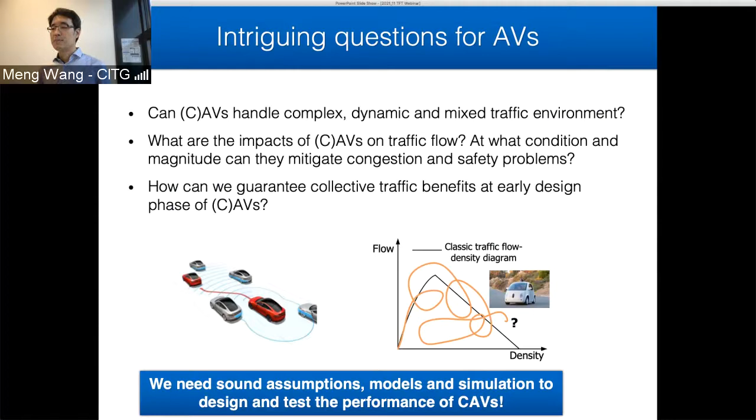Automation may give you accurate control of your vehicle. If you set your speed at 100 kilometers per hour, the automation system can precisely track this speed. Automation can also be reliable if well designed, and it can react faster if it can communicate with other vehicles or infrastructure.

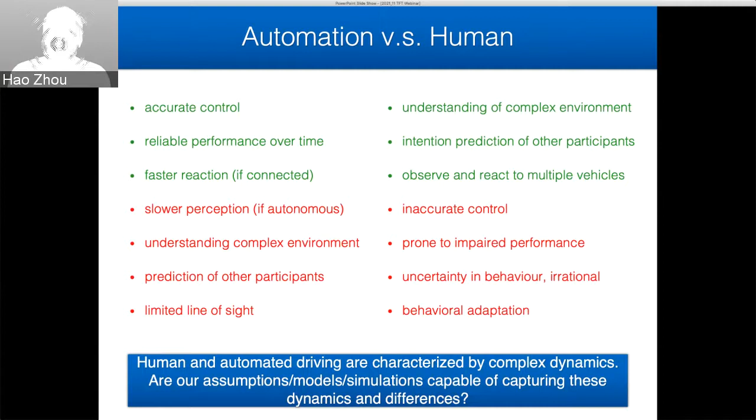But these are actually not good aspects for human drivers. We cannot precisely control our speed or steering. We are prone to impaired performance under alcohol or drugs. Our behavior is sometimes irrational, and we adapt our behavior based on the dynamic environment.

On the other hand, automation, if it relies only on onboard sensors, the perception is actually not very fast. It's a challenge for automation to understand complex driving environments, and it's difficult for them to predict other traffic participants. The onboard sensors are also occluded, therefore you have limited line of sight.

But for human drivers, experienced human drivers are very good at understanding and making decisions in complex environments. With the blink of an eye, you would know whether a pedestrian in front of you will cross or wait. We also often observe and react to multiple vehicles. These are actually advantages for human drivers.

Now we can see that human and automated driving are characterized by complex dynamics. The question is, are our assumptions, models, and simulations capable of capturing these dynamics and differences?

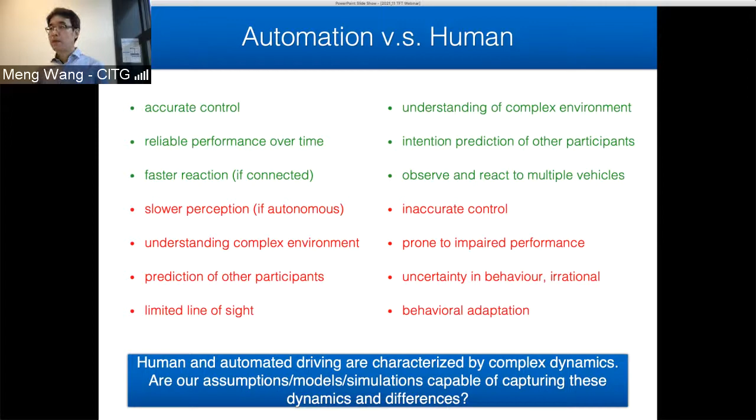What we often see is that for the ego vehicle, either an automated autonomous vehicle or connected automated vehicle, there are assumed to be zero delays in the sensors and communication, zero delays in the vehicle actuation system, deterministic vehicle dynamics, no limits on sensor range, no limits on operational design domain, and therefore no human-automation control authority transition.

Now, we all know that all the automated driving systems being developed have limited operational design domain, and this clearly shows that we are missing something there.

For the surrounding vehicles in mixed traffic, I want to make a point: we also use simplistic assumptions about their vehicle dynamics. Especially, I want to point out here the lateral motion.

In many traffic simulation environments, the lateral motion is lane-based, so vehicles are often centered at the lane center, meaning there's no lane-keeping behavior modeled. And when vehicles change lanes, they either jump instantaneously from one lane to the other, or jump over a fixed duration of time.

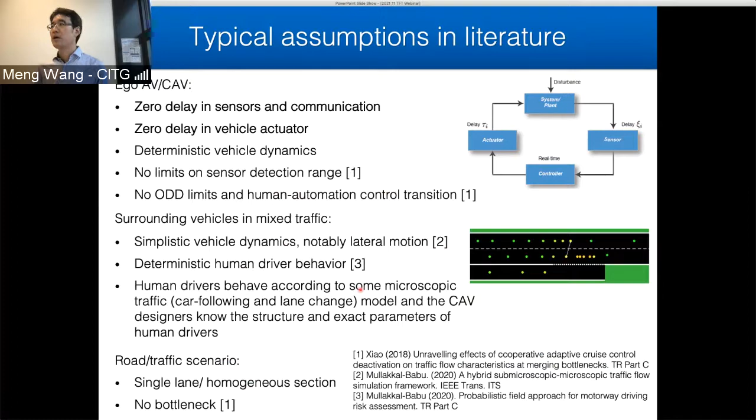Today I'm going to focus on the first two points, which relate to the delays in the sensors, communication, and vehicle actuation systems.

Let's start with the ACC system, which is the topic of this webinar series. ACC, in my definition, is an autonomous system in the sense that these systems only rely on onboard sensors and there's no communication involved. In general, they operate in cruise control mode at some desired speed when there's no predecessor, and then follow the predecessor with some desired distance, which is often a function of ego vehicle speed. You also want to track the speed of the predecessor with zero speed difference.

Such systems are often myopic in the sense that you only react to the direct predecessor. Because of physical properties of the sensors and actuators, there are actually delays in the information you get from the onboard sensors, and there is also a time lag or delay in the actuation part of the system.

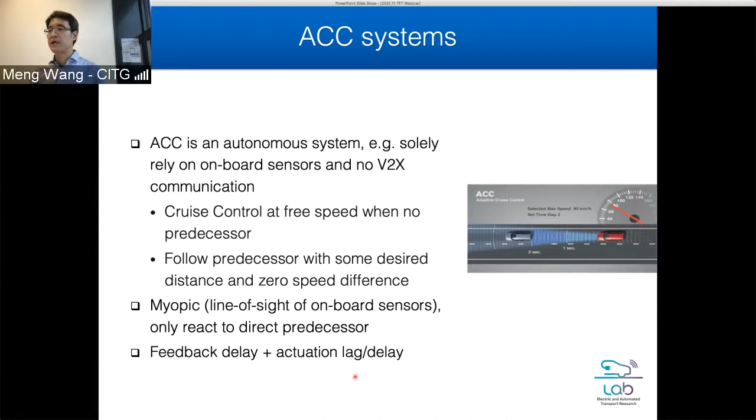We want to know the system dynamics. If you differentiate this state vector, you get relative speed, the acceleration of the leader and the ego vehicle, and the derivative of the acceleration of the ego vehicle, which is the jerk, formulated in this fashion. Here, tau i is the actuator time lag, to be precise, and u i is the control input we want to compute. a i is the actual vehicle acceleration. So what this says is that with tau i, you cannot realize your desired acceleration instantaneously, but this needs to be realized after a lagged time.

So how do we design u i? There are different ways. In general, when we compute u i, we formulate it as a function of spacing, ego vehicle speed, and predecessor speed. We want to include delay in there, so these three signals are subject to a delay xi. When we put this control law back into the system dynamic equation, we get this closed loop formulation of the system.

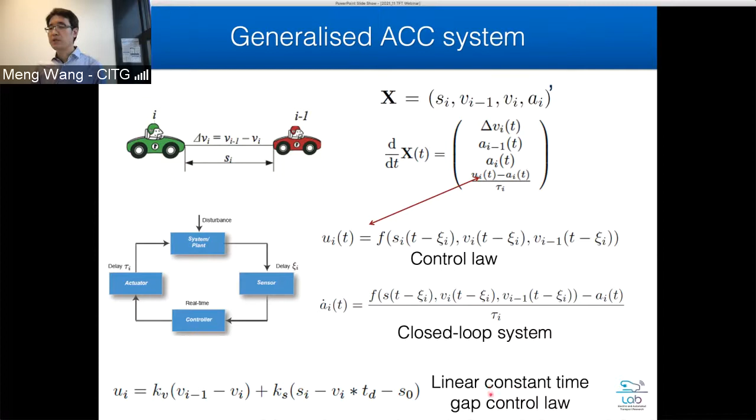Now, with this formulation, we go to the definition of string stability. In general, there are two types. One is very strict, what we call strict string stability. This says that H(jω) is, in general, a disturbance transfer function, where ESI is the disturbance of vehicle i, and ESI minus 1 is the disturbance of the predecessor. For strict string stability, we examine each leader-follower pair, and we require that the disturbance of the follower is smaller than that of the predecessor.

Another, a bit weaker concept is head-to-tail string stability. I don't really care what happened in between the platoon, only the first vehicle and the tail of the platoon. As long as the disturbance at the tail is smaller than that of the head, the platoon is head-to-tail string stable. For a homogeneous string, where all vehicles are the same, there is no distinction between these two definitions.

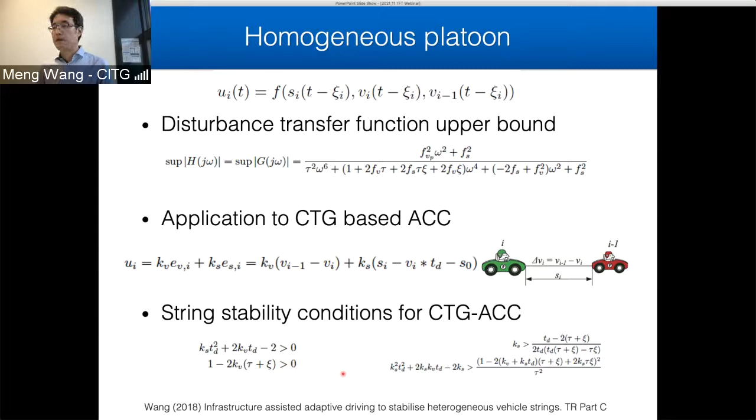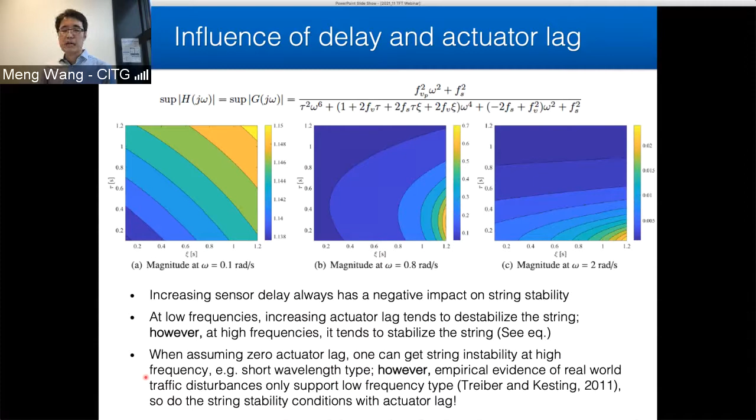And so do the string stability conditions with actuator lag. If you look at these conditions at high frequencies, there won't be disturbances or string instabilities. So that means we have to be careful when modeling sensor delay or reaction time without considering the actuator lag — you may get into string instability at high frequency disturbance, but this is not realistic. That's one message I want to convey.

Now let's look at the influence of the three design parameters we mentioned: the time gap, the feedback on gap error, and feedback on speed error. In these plots, on the top three plots, we see the different region in the Ks and Kv plane under a certain time gap setting.

The green and blue regions are stable regions, and the orange and dark red regions are unstable regions. The top three figures are results with delay considered. The bottom three figures are the same parameter setting but without any delay.

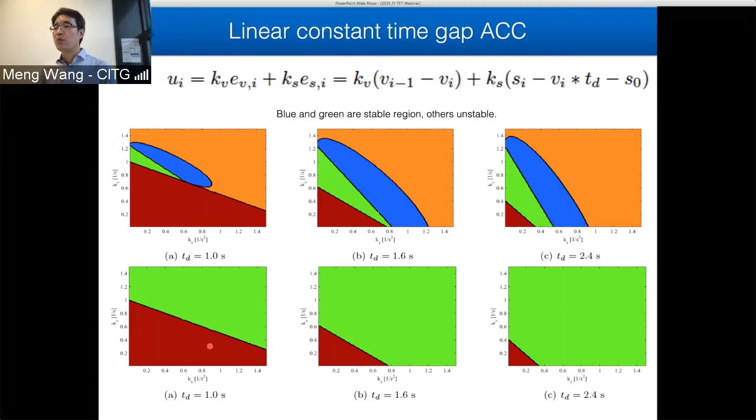So what you see clearly is that when we don't consider sensor delay and actuator lag, you really overestimate the stable region. Now the consequence is that you may overestimate the benefits of such systems when you use these to simulate ACC or CACC, and this may even lead to invalid parameter settings that you assume to be stable, but in reality they are not.

So here is another message that I want to bring across: we really have to be careful to derive conclusions when you parameterize your controller or your model based on a zero delay assumption.

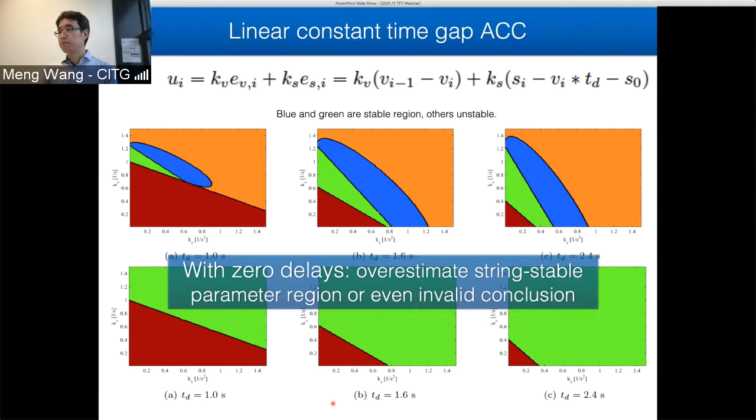Now, as I said, I am an engineer. I also want to solve problems. So we know that delays are detrimental for string stability, and we want to see how we can compensate for delay.

An intuitive solution is that at the current time t we don't have the current state information, we only have delayed state information. So one of the solutions is to use a state predictor, and one of the well-known ones is the Smith predictor, and then use the predicted state still in the state feedback controller. I listed two examples here, and there are other examples in this line.

I want to talk about four other solutions which we have done some work on. This includes using model predictive control to compensate delay, formulating a new desired spacing policy that anticipates the delay already in the spacing policy, and reformulating the CACC from time domain to space domain, and resorting to vehicle-to-infrastructure communications. So let me get you through these four solutions one by one.

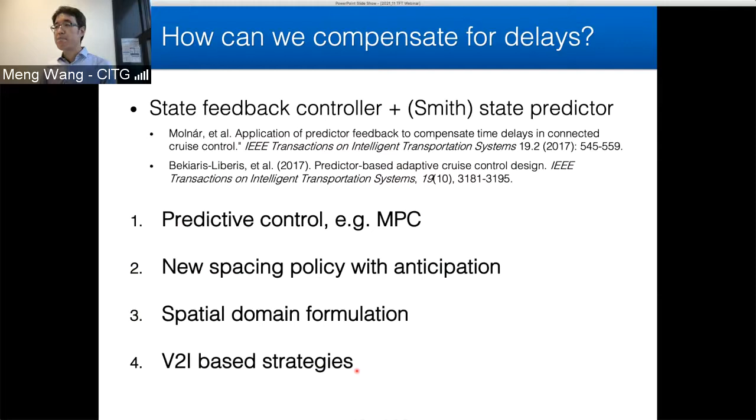So let's start with the model predictive, MPC based strategy. I list here a minimal formulation of MPC. There is no need to understand all the notations I listed here.

But for MPC, you do need a cost function or cost functional you want to minimize, and you need a model for your system dynamics, and you need an initial condition at current time t0. And these state variables x and control variable u are often subject to some constraints.

Now, the idea of MPC is that at the current time t0, you want to use the initial condition and the system dynamics and some arbitrary control input to predict the system trajectory in the future, which is the solid red line. And you want to optimize this trajectory of u such that the difference between the predicted trajectory and the desired trajectory is minimal to some extent.

And then for an MPC setting, I don't use all of the predicted optimal control trajectory, but only use the first sample to regulate the system. And then at next time step T1, when we have new sensory information or communication information, I redo this optimization again, and again I only use the first sample. So this is the general idea.

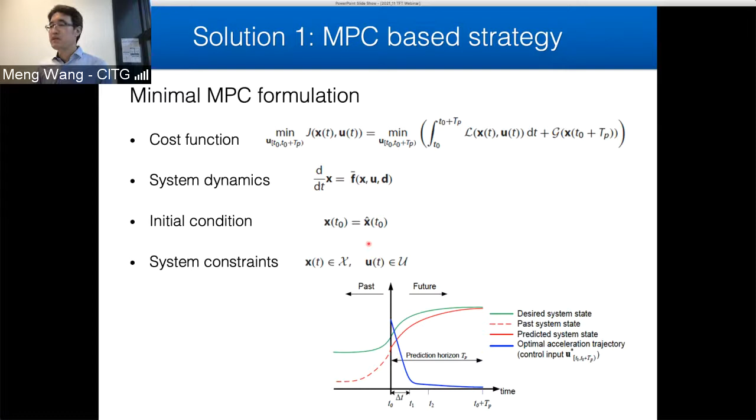Now, when we have delay, there is a problem, right? The problem is that we don't have the current state information, we only have delayed information. How can we do MPC in this setting? I use the figure here to illustrate the problem and the possible solutions.

Now at this time t, we want to have this state information, but with the time delay, we don't. We only have this state information at previous time t0 minus the delay. And then how do we do the MPC? We still need to have this state information at t0 and make a prediction.

A naive strategy, which I call it, is to simply use this state information, add the information at time t0. This is visually shown here. So you basically drag the state information to the current time, and you can clearly see there is an error here. On the top is the real state you want to use, but actually you don't get that information, so you use this old information instead.

The second option, because we are doing MPC, is to shift this prediction initial time from t0 to t0 minus xi. And because typically the TP will cover a longer time than t0 plus t1, I can still use this initial condition, this initial time, to compute some optimal control trajectory that spans over this t0 to t1, and I use this sample to implement to the real system.

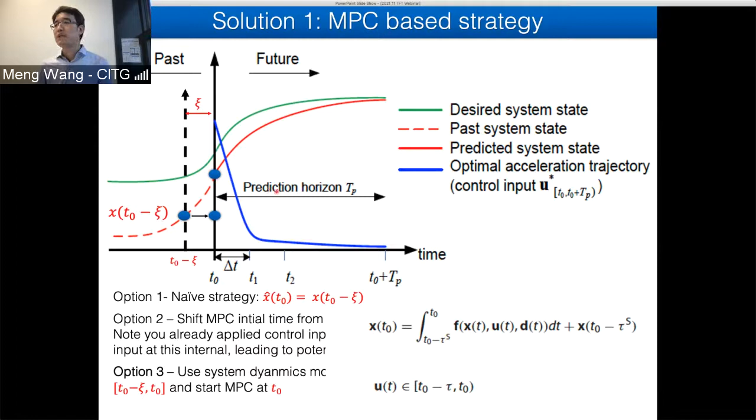The third option I'm proposing is: we have this delayed information, we have a system dynamic model, and we have applied the control history at this interval. We use that to estimate the state at this t0. Mathematically, this is just an integral. So what I want to estimate is the state at t0, integrating using the initial condition. I use a different notation for delay, but what I mean is this state information, and I know the control history in this interval. Then I can get an estimate of this state, and then I start with the MPC again. So that's the idea with the MPC-based strategy.

And with that, I can show this simulation: this is the case without any delay compensation, and this is option 3, using this MPC-based delay compensation strategy. You can clearly see the benefits.

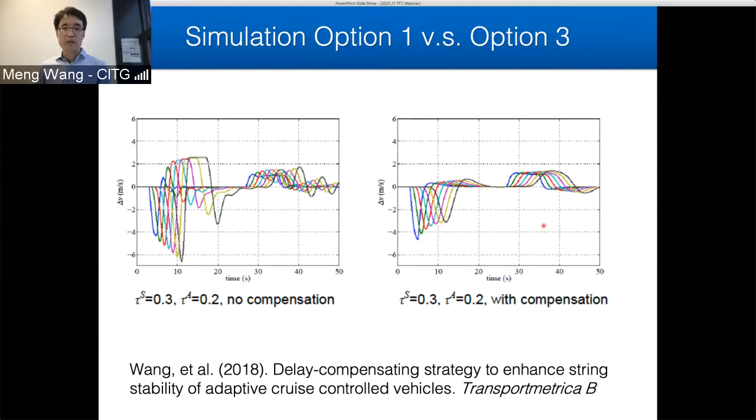So we want to reformulate a gap policy such that the platooning system becomes stable again. To do that, we again need to reintroduce some basic formulation. We use the same vehicle dynamics I introduced before: position, speed, acceleration derivatives result in this actuator time lag.

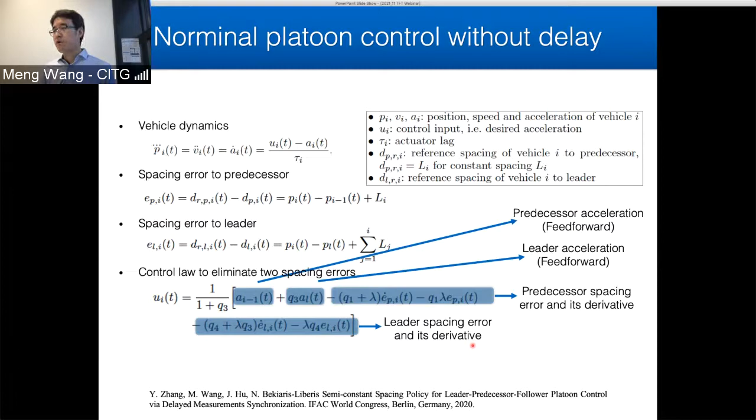Assumptions made in this work are that there are communication delays in whatever communication link we assume. The position and speed of the predecessor are obtained from onboard sensors, so subject to constant delay delta S. Acceleration of the predecessor is assumed obtained from vehicle-to-vehicle communication, with a bounded delay delta p, and the position, speed, acceleration of the platoon leader is obtained from vehicle-to-vehicle communication and subject to bounded delay, with an upper bound and lower bound.

We also assume that the leader information delay between 2 consecutive followers is bounded. So the communication delays are time varying, but we know their upper and lower bounds. The vehicles in the platoon can have different delays and different desired gaps. So these are the assumptions we made when we designed the system.

So let me give you some insights into the two error terms when we have delays. Something interesting will show up here. When we have delay, we don't have the current information, only a delayed leader speed signal.

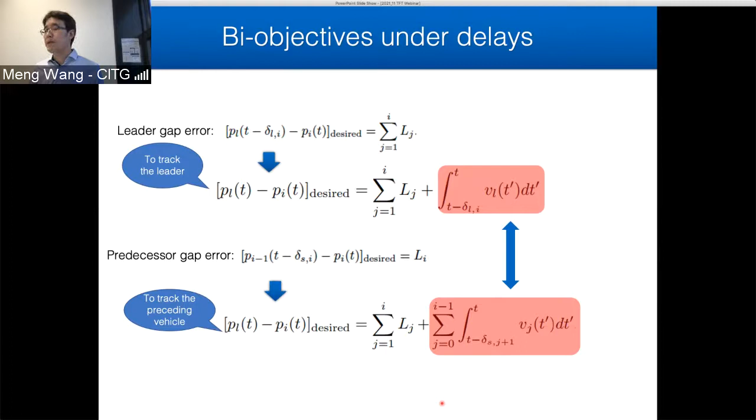So that leads to the instability we see in the simulation. What we propose is to add an extra term. I use GI here to represent a memory time window. This basically says, apart from the constant spacing, we also add the distance that the predecessor i-1 traveled during this memory time window. How to select this memory time window: it should be larger than the maximum delays of the different delay sources—sensor delay, communication delay, and the delay difference between consecutive vehicles in the platoon.

With this new policy, we can recompute the predecessor gap error and leader gap error. So GI will appear in the position of the predecessor term, and HI will appear in the position of the leader gap error, leader position term. HI is not a new parameter, but a sum of the GI over the memory time window for each vehicle between the subject vehicle and the leader.

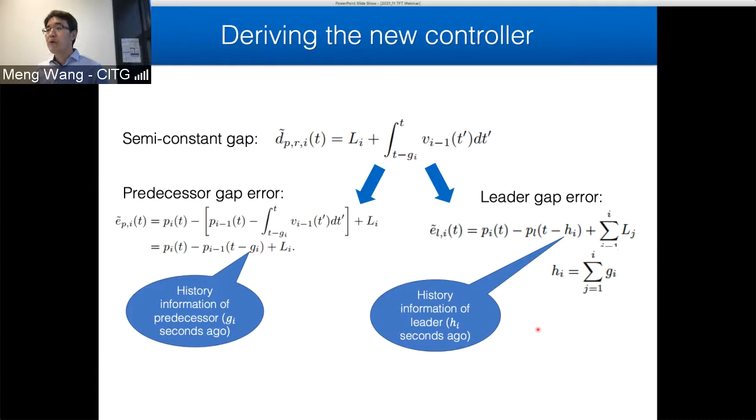So with this new error term, we put it back into the control law. What you see here is the same control law with the same control parameters, but only the time argument of the signals is different. What I want to highlight is that all signals related to the preceding vehicle i-1 now become t minus GI, and all signals related to the platoon leader have time argument t minus HI—for acceleration, speed, and positions. So at least for each vehicle, the signals are synchronized.

If you plot this magnitude plot, you can see that without treating the delay, this platoon example is unstable because the magnitude is larger than 1. But with our new formulation of the spacing policy, we get a stable string.

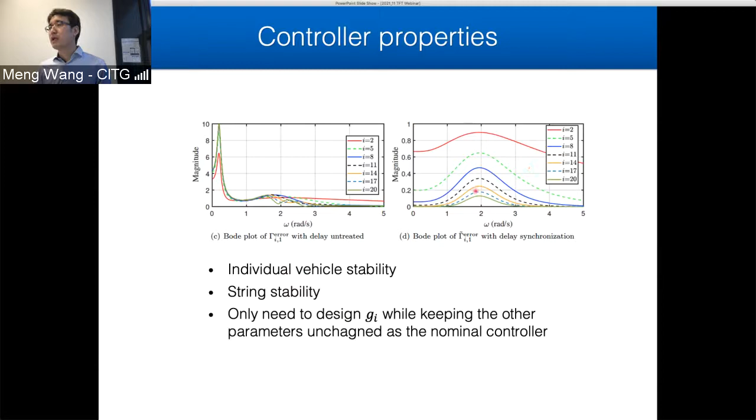And this is clear also from the simulation results. On the left, the nominal system without any delay is stable, but with communication delay, the string becomes unstable. With our new spacing formulation, even with delay, we can compensate such that the string becomes stable again.

Now, this idea of reformulating the spacing policy appears to be generic, in the sense that it can be applied to the constant time gap policy of CACC with both communication and actuator delays.

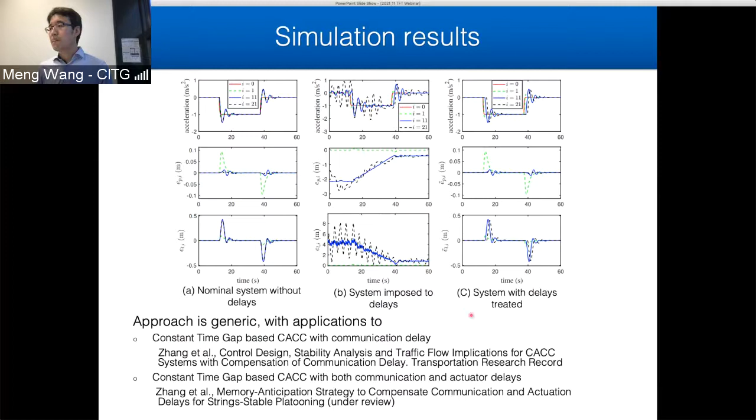So I will stop the second solution here, but go quickly to the third solution, which is to reformulate the CACC system in the space domain. The idea is to use distance traveled as the independent variable and time as the dependent variable. The advantage is that when you look at a certain position, you want to regulate the ego vehicle such that it keeps a desired gap to the predecessor at the same position.

And then often at time t1, you already know the history information of the predecessor. Although there is a delay, as long as the desired time gap is larger than the delay, you can actually have this information. Now, how to do that? We need to do some translation from the time domain to the space domain. I guess I need to hurry a bit here.

So the independent variable is changed from time to space, and the dependent variable is swapped. In the time domain, you have the first derivative of speed, then the second, acceleration, and the third derivative, jerk. In this space domain, we use a similar concept, calling it slowness, moderation, and derk. And the relative dependent variable in the time domain is the distance headway, but in the space domain, we call it the time gap.

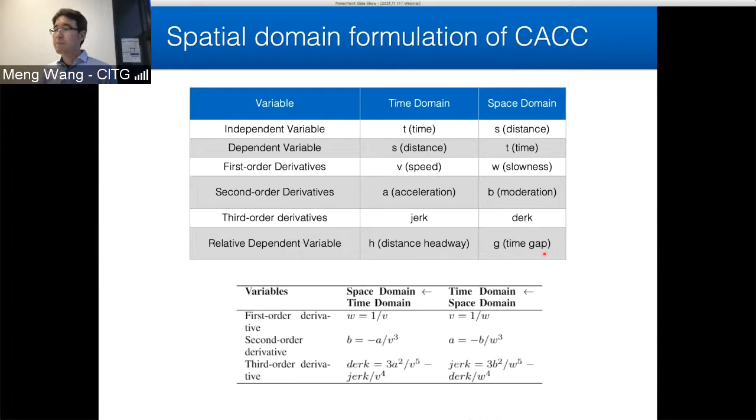In the state space formulation, we formulate the state as the difference between the desired time gap and the real time gap, and the difference between the slowness of the ego vehicle and the predecessor, and the moderation. This is equivalent to the spacing error, speed error, and acceleration in the time domain formulation. The control input here is the desired moderation, equivalent to desired acceleration. For the objective function, we just use a quadratic form.

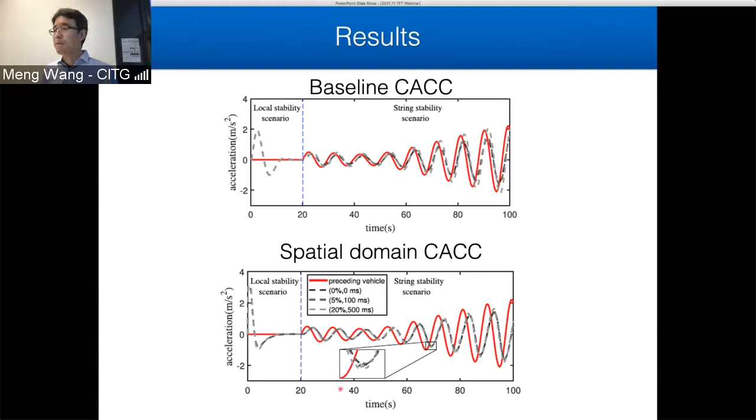Here is the simulation result. In theory, we can prove that this is string stable. Here I show the simulation: if you see this baseline time domain CACC, the dashed line is the follower profile, and the disturbance is larger than the predecessor, which is the red line. In the space domain formulation, if you zoom in, you can see that the disturbance is smaller than the predecessor. So this is the third solution I want to mention.

The last one is to resort to vehicle to infrastructure communication, because V2V is nice, but there are uncertain business models, and you need a decent market penetration rate to get platoons. What can we do at low market penetration rates? Here's an idea that we thought could be useful to stabilize a mixed traffic string.

Suppose the intelligent infrastructure can obtain the position and speed information of a string of vehicles and estimate their parameters. One of the vehicles, a CAV, can communicate with the intelligent infrastructure about its exact control and system delay parameters. With that, you can compute the string stability condition of the platoon. If it is unstable, you can adapt these CAV parameters, the desired time gap, the feedback gain on speed error and gap error, to stabilize the platoon. After the disturbance, the CAV can restore to its default parameters.

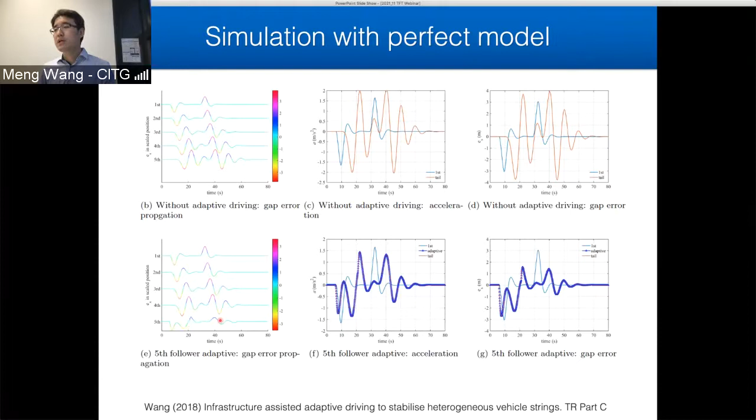Here's a simulation with a perfect model. The fifth vehicle is when we don't do any adaptation, the disturbance is larger than the first vehicle. But when we do this adaptive driving parameterization, you see the disturbance is damped out.

Let's come to the end of the talk. There are assumptions that we use in modeling and the design of the ACC and CACC. We really should be careful in order not to overestimate the benefits and to avoid invalid modeling and design results. The delays are intrinsic properties and have detrimental effects on string stability, and the influence of parameters on string stability can become non-monotonic under delays, so we really have to be careful there. I illustrated a few strategies that we can use to compensate for delays.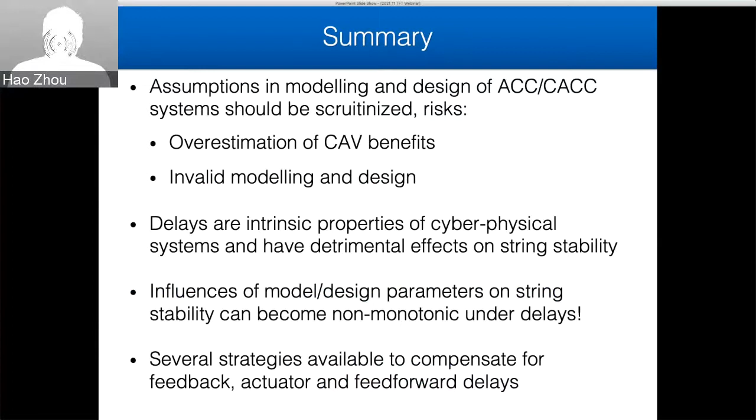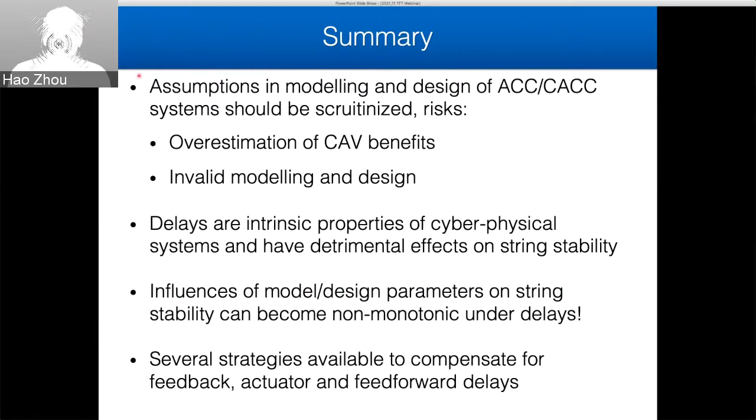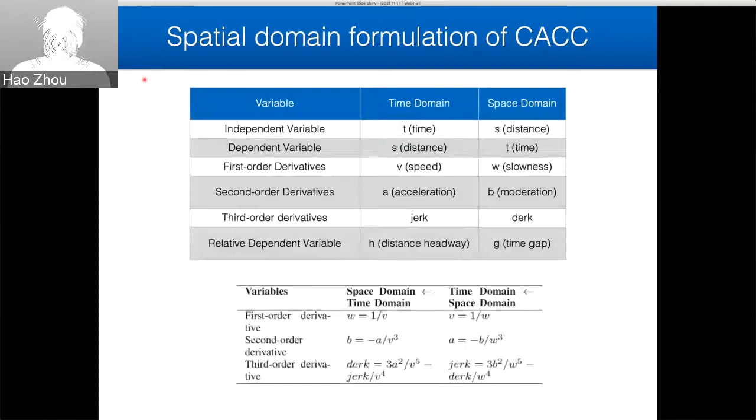I have a question first. Can you go back to solution three? You went a bit faster there, the space domain formulation. You mentioned you use your leader's trajectory as a reference. Can you elaborate a little bit more on how you use it as a reference? Is it similar to MPC or something else?

So this is indeed an optimal control MPC type formulation. At each space position, I want to regulate the ego vehicle such that it keeps a desired time difference to the predecessor. When you are at this time, this position is history information of the predecessor. So although there is delay, you mostly know this position. That's why this formulation is robust to communication delay.

Okay, I see. It's actually similar to the well-known Newell's model, but now your x-axis is space. Yeah, the y-axis kind of reverses the space-time diagram. Yeah, so I got your idea. Very, very neat idea. Thank you.

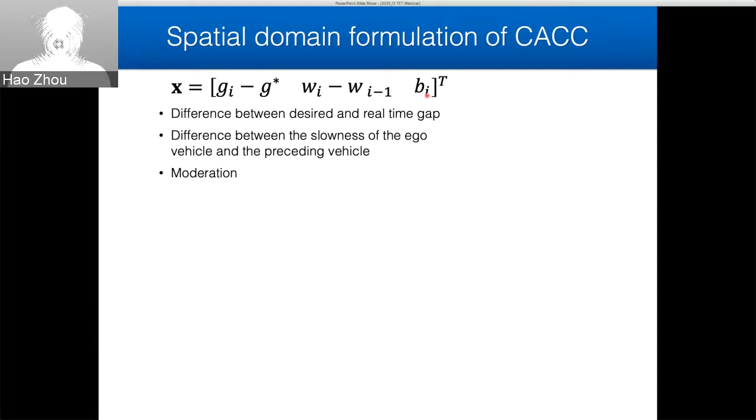Speaking of the error, what did you measure? How do you define the error term here, in this space domain formulation? When you compute the cost, it's based on time—the difference between the desired time gap and the real time gap. The second is the difference between the reciprocal of the speed, and the third relates to acceleration. These three terms are equivalent to the time domain: spacing error, relative speed, and acceleration.

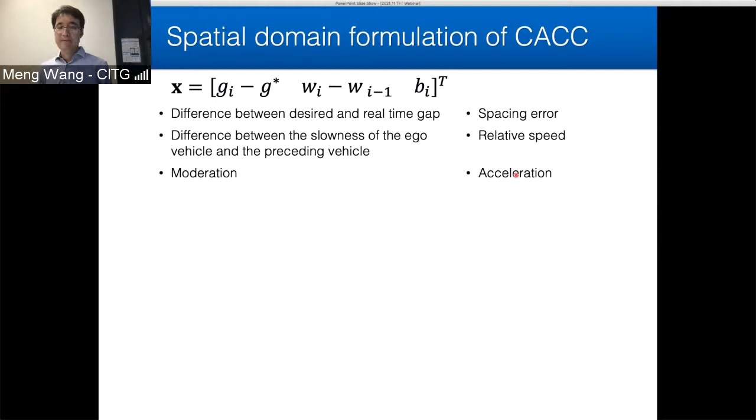Have you already published this work, or is there a paper so I can check it out later? Yes, the paper is here. Okay, I see. Excellent, thank you.

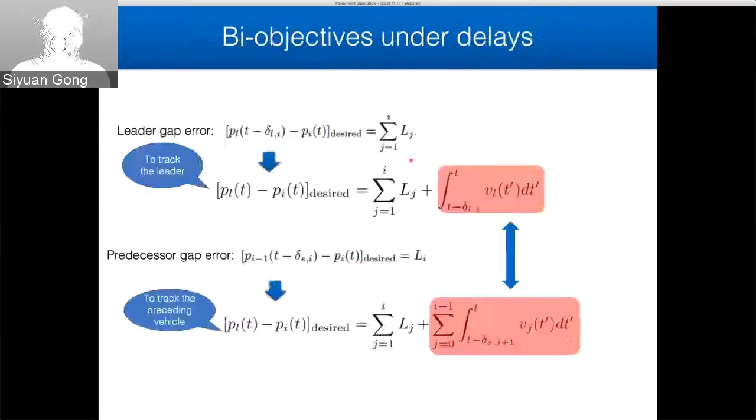Thank you. Yeah, I think so. I want to emphasize the second solution approach, the new formulation of the spacing policy. Here, for the communication delay, we do not assume it's constant—we assume there is a time stamp for every signal, so you know the time stamp of each signal. In this formulation we assume the sensor delay is constant, but this can be relaxed in this solution direction. We have current work where we do not assume the sensor delay is constant, so it can still work in this solution.

For other solutions, I think if the variation is still acceptable—let's say we roughly know the lower and upper bound of the variation—the solution direction can still work. If the variation is unbounded, I don't know how to deal with it. Got it.

Okay, thank you, please. Okay, hello Meng. Thank you very much for presenting your work at our webinar. It's really interesting, I really love it. Thank you, I have two questions.

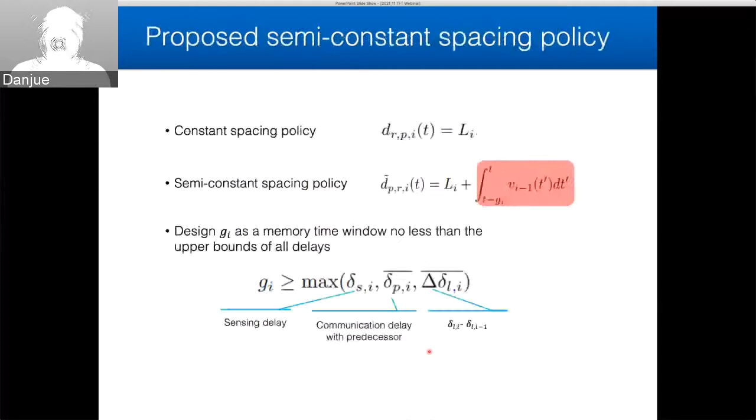Another question: in your last solution we used V2I. Do you think there will be an advantage in terms of the communication delay and error? Because I imagine it will take longer for the infrastructure to do the computation and pass the message back. Yeah, I think that's a good point—I did not consider this delay.

What I want to say is that here I consider a traffic disturbance which typically has a duration of 10 to 20 seconds. In this setting, a delay of 0.5 seconds doesn't really affect things much. You can also argue that in intelligent infrastructure you can have more computation and communication power, with more investment such that the communication system is more reliable and much better than the onboard communication system. But in this work I simply did not consider that, and that's indeed an assumption.

Yeah, but this framework, I think it can be directly applied to, for example, those autonomous vehicles that have very strong sensing capability that can just directly sense the vehicle nearby. So let's say if you have a sensor that can sense not only the direct leader and follower, but also a few vehicles ahead and behind, then this concept can be used without vehicle-to-vehicle communication. I think we do see that from Waymo's self-driving cars, they're able to sense up to 5 or even 10 vehicles ahead, so I think they can do this directly. For those expensive luxury automated vehicles, they do have the potential, but I'm not sure that's scalable to production vehicles, because those sensor sets are quite expensive.

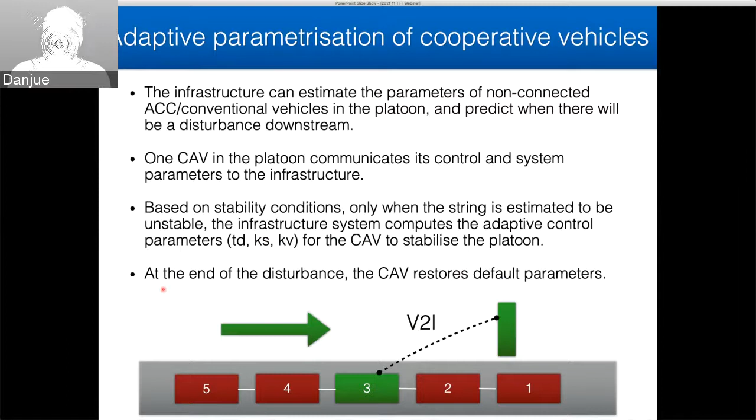No, we made quite some strong assumption here, as I said up front, which is not really realistic. We assume the intelligent infrastructure can measure the position and speed more or less accurately, and use that to inverse some car-following model parameters. And we didn't assume that the human drivers are time-varying in their parameters. So that's the assumption we made for the time being. I don't have empirical evidence, but this can be an interesting work to investigate: to what extent, with a powerful roadside sensing system, you can estimate the behavior parameters of human drivers.

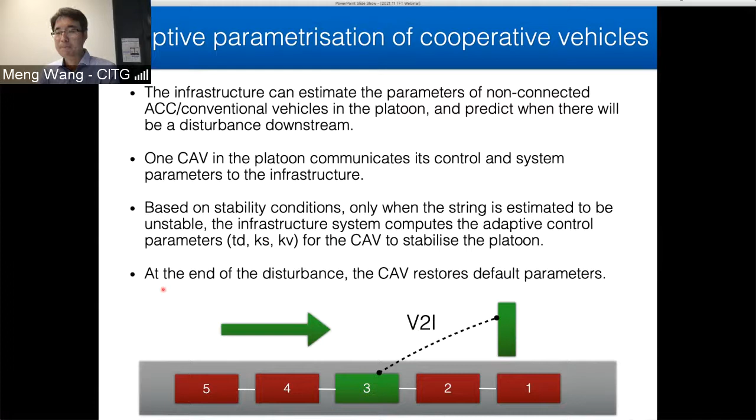Thanks so much, yeah, that's all my question.

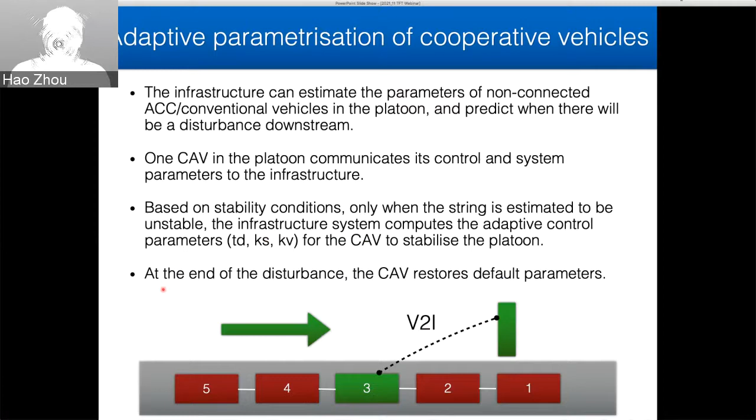Okay, Dr. Wang, I have a follow-up question about the advanced sensing technologies. So recently I got the chance to drive a Tesla vehicle. I noticed that on curves, especially on highways, Tesla on its autopilot display, we can clearly see Tesla is able to detect multiple leaders, sometimes 3 to 4, and at the maximum, Tesla claimed that they can detect even more than a dozen of vehicles.

So my question is that I always feel the boundary between ACC and CACC is vague to me, and I like the definition at the very beginning. You said ACC, by your definition, is a system based on its pure sensors, not communications. So with that being said, and some ACC vehicles can already detect multiple leaders, what's the difference between ACC and CACC systems? Does there still exist a difference if ACC can detect multiple downstream vehicles?

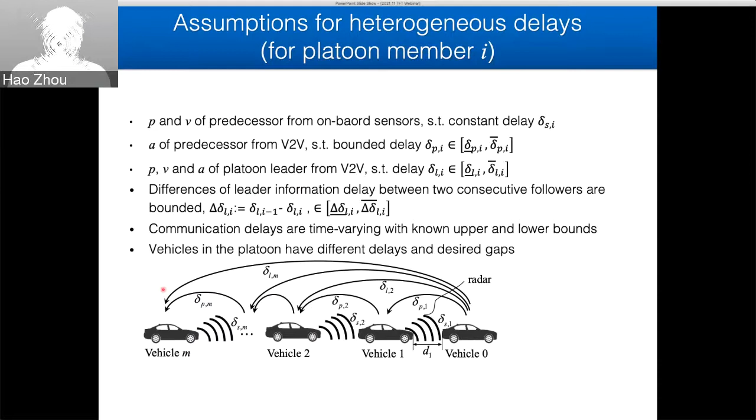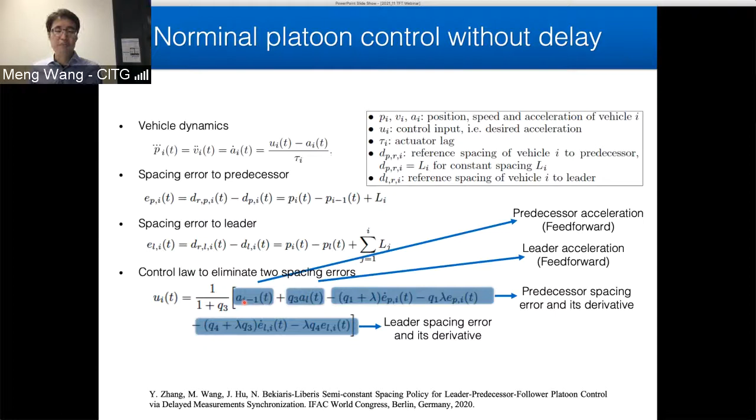Yeah, I think the difference in terms of the controllers - if you can see multiple vehicles ahead, then from the controller formulation, an ACC can be converted to a CACC. I think the difference is, at the moment, at least, based on using vehicle-to-vehicle communication. For instance, we use this term as the feed-forward term, and the quality of this signal is very important. As I said, you can even use onboard radar to estimate the predecessor acceleration information, and then you can formulate a CACC using onboard radar. But the signal is so noisy that you cannot use that in your controller design, in your control law. So that's why people use vehicle-to-vehicle communication instead of only using onboard radar. I think the concept we are talking about at the moment is still whether you use communication or not, but formulation-wise, an ACC can use onboard sensors - you can, in theory, also formulate a CACC controller in that sense.

Okay, yeah, that's a very good point. Thank you. You're welcome. Okay.

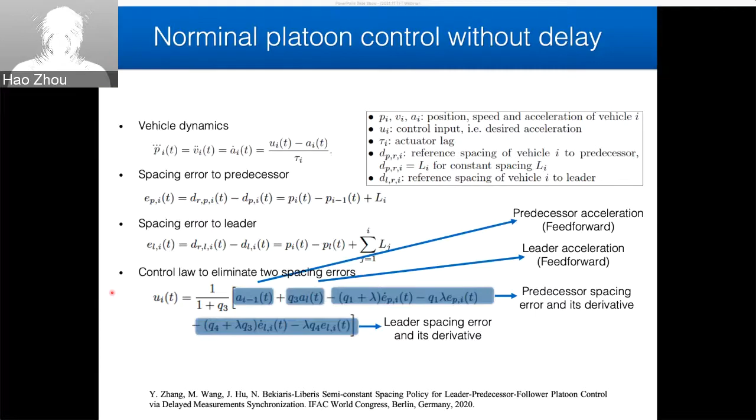Danjue, can you hold on a minute? And Zimin, Zijian, if you're already here - okay, no, not anymore.